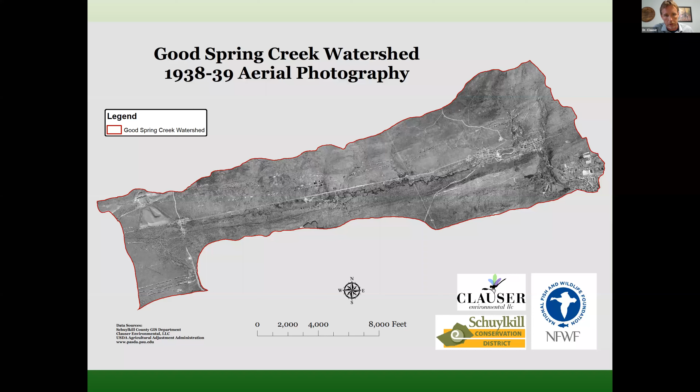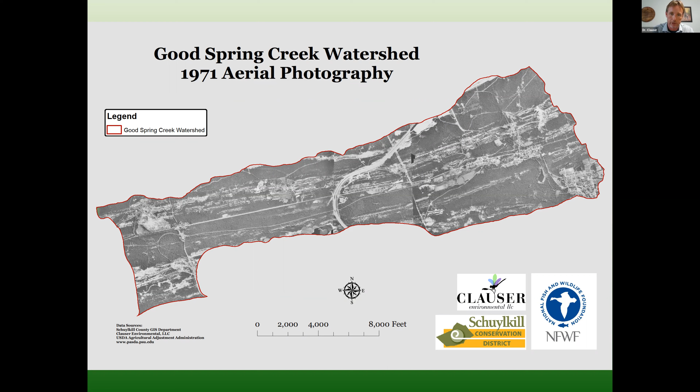And as you move from year to year, by decade or two decades in this case, you can see that the watershed overall became more forested, and there was also more development. So as things continued to get forested, mine drainage got cleaned up, but there also was Interstate 81 coming in, and we tried to figure out what's going on there with that past history of mining.

And overall, you can look at the watershed, and we assessed how many square miles there were that were forested versus impervious. So we're looking at each section of the watershed, and we really dove into that in the report, but it's sort of dry information for a presentation. So we're going to talk a little bit more about the restoration planning tonight and where we take this plan and how we get to the next steps.

So if you look at the picture in the upper left, that's showing the stream section where essentially the floodplain is disconnected. So there's been sedimentation, or maybe the channel got moved or something like that. And when that happens, the water rushes through the channel very quickly. It erodes the banks, and it basically contains all of that water and doesn't give it a place to spread out and expand. It doesn't have this interconnection with the floodplain to take up nutrients and pollutants.

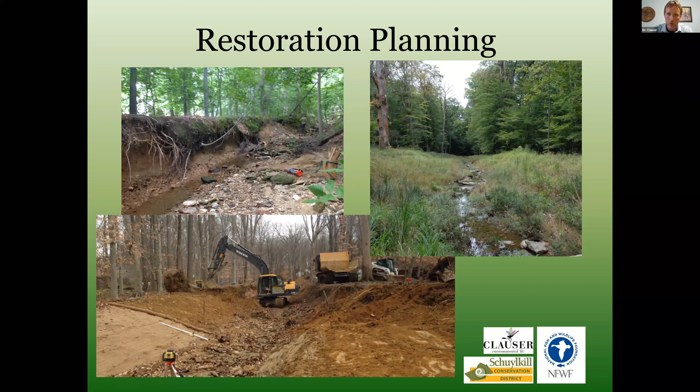And when you go in to restore the stream, you can pull back the banks and stabilize them. If you look at the left side of the channel in the bottom picture, they're basically laying it back at a stable slope, so it will not be releasing additional sediment into the stream. If you look at the right side of that bottom photo, we're actually putting in a floodplain bench there, and it's giving a place for the water to go, a place for it to expand into. And in time, it will start to grow up like the picture on the right and return to a stream that is functional and a benefit for water quality downstream and for fish and whatnot that live in that area.

So how do you get to that point of doing those projects? Well, what we needed to do was put together a plan that had GPS points, identifying particular locations with particular action items. And then we needed to prioritize those projects, put cost estimates to them, come up with potential partners so that we had people we could work with in each section, and then also convey the information for each area with a handout to provide to the landowner so we could educate people on what we were trying to do.

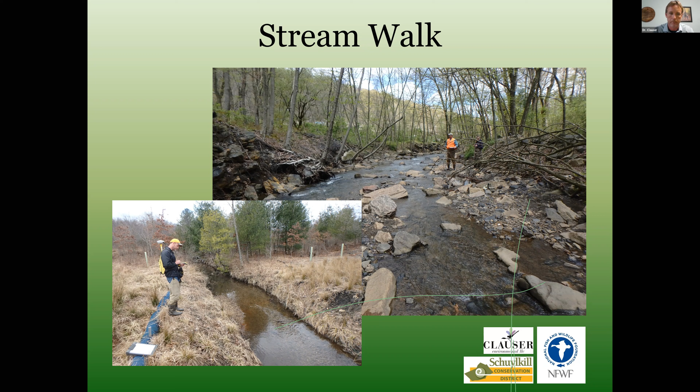So we did that by completing the desktop review, which you can read more about when you take a look at the plan, but we also did a stream walk. So the stream channel is 6.8 miles long in Good Spring Creek watershed, and Wayne and I and Alexa walked the whole stream channel, and we looked for places we could do things. Also places that were good, and we tried to figure out what can happen at each particular location. So there Wayne and I are walking through the watershed and collecting notes, photos, and GPS coordinates of things to do.

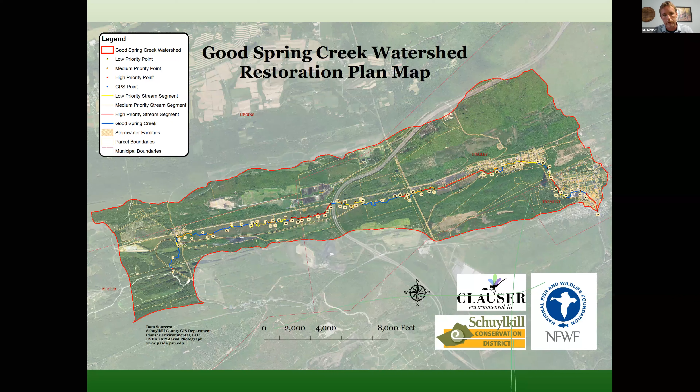And that gave us this restoration plan map. So this is the whole watershed here. If you look on the right side, along the east there, that is the town at the bottom of the watershed. That is Tremont. And then if you look at all those little yellowish colored dots, they have little numbers in them. And those are GPS points where we have something to say about what's going on in the watershed.

So if we zoom in more closely at that map, you can get a picture of what these identified projects look like. So if you look at number 14, that's a yellow point. That's a low priority point. So there's something you could do there to fix up the watershed. Maybe it's a small tree planting. Maybe it's something that particular landowner can do. Maybe there's a four-wheeler trail that is washing things into the creek.

Then if you look at some of the other sections that are orange, like 19 to 21, that's a project that's more substantial and will have, getting on the point of, measurable impacts to the creek downstream. And then if you look at section 25 through 32, those are the red projects here, and those are our high priority projects. So tonight I'm going to talk specifically about the high priority projects, and we're going to walk through those, but certainly take a look at the restoration plan.

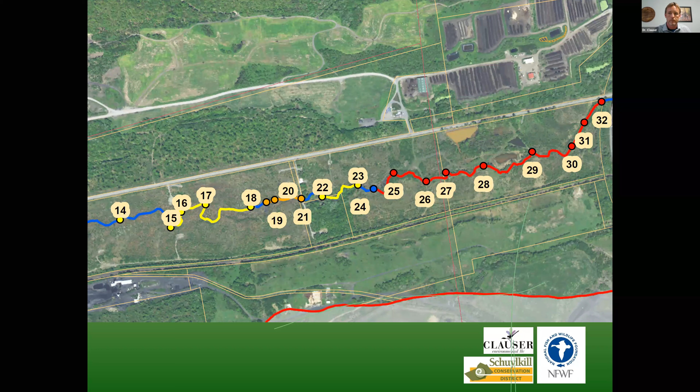If you look at the plan and you own property along the watershed, or you're familiar with the watershed, it might give you some things to do in your own backyard or nearby. So when you look at those sort of mapped areas, we came up with this prioritized list. And for each of those GPS points, there's a description, there's action items, there's partners and a priority, and then comments on it. So you can basically reference the map and come up with what can be done in those areas, or maybe it's just something to say about a particular spot and what's going on there to say, yes, this section looks pretty good.

Wayne and I were surprised when we did the study that there were miles of stream out there that looked really good. But then within the plan, we took the medium and high priority projects and we talked more specifically about those. So here's an example of one of the high priority projects. Within the watershed itself, near Good Spring, there's actually wildcat sewer discharges. So right now today, there are people that flush their toilet and the waste goes right into the stream. So this can be a problem for pathogens, for nutrients. It's just not a real good way to keep your stream in a healthy situation.

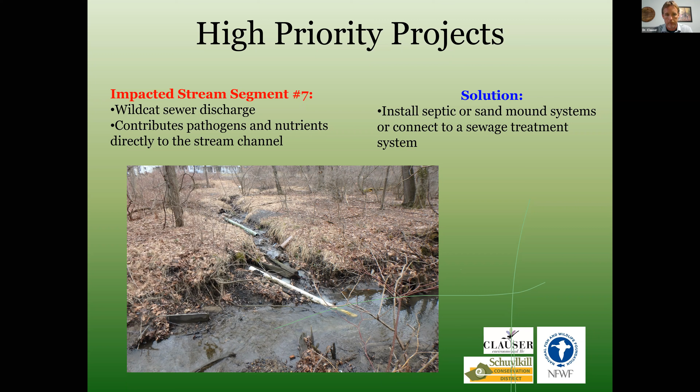And more importantly, from a biology standpoint, that fine sediment is a major problem in that it clogs up the bottom of the channel where there's rocks. So if you can picture this beautiful, pristine stream, like in the movie A River Runs Through It, where there's these boulders and cobbles. What happens with this fine sediment is it covers that up. And when it does, there's not this real diverse habitat for mayflies and stoneflies and all of these non-biting insects to live, things that would normally feed in the creek, come out, breed, and then lay eggs back in the creek. But instead it creates basically this wasteland desert bottom that's just sediment.

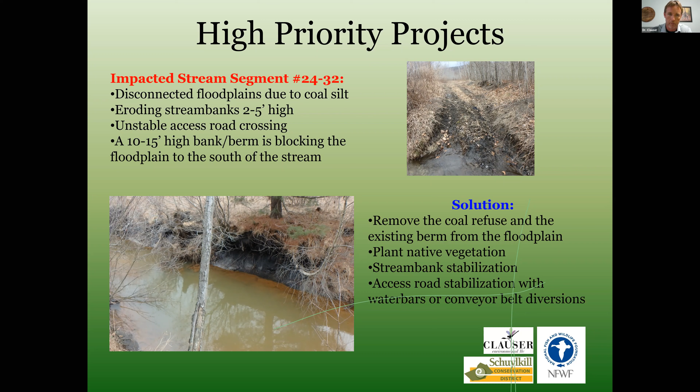Moving downstream, one of the places we came across on our walk had what's called a knickpoint. So the way streams erode, essentially they start downstream and work their way upstream. So if you think about a waterfall, the power of the stream is creating a scour at the bottom of the waterfall. And over time, that waterfall is working its way backwards upstream. So a lot of times people think that erosion begins at the top end, but in general, the erosion begins at the bottom for how these channels are digging themselves out and digging themselves down.

It can be upstream problems causing excessive water flows, but the knickpoint can really be an inflection point where you need to come in and stabilize it. So we found a knickpoint where the channel had been diverted and it's working its way upstream. So for a spot like this, we can do things like stabilize it with what's called a cross vane.

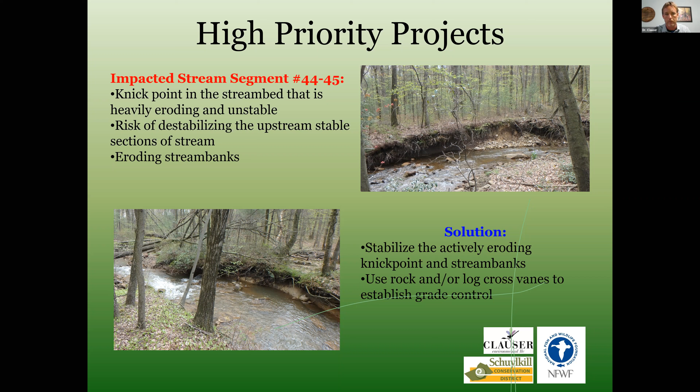So essentially we can put in a rock or a log structure that's sort of shaped like this, and you face that into the creek, and the water will roll over that structure and put the energy in the center of the stream, helping to stabilize the outside banks, but also that sort of throat of the cross vane structure in here will actually set grade. So you can step the flow of the creek down in a more gradual fashion and help prevent this largest slug of sediment from coming down the creek.

Another area, as we work our way downstream, we found really steep banks, about 15 feet high, that were actively eroding into the creek. And same thing here, basically pull back the floodplain, stabilize it, and plant native vegetation. Sort of a recurring theme in the watershed.

One of the major projects in the watershed that currently is under construction is, if you look at the upper photo in this slide, it's showing the 20 plus foot high banks that are basically waste coal that was placed in the floodplain. And every time you get a storm, the water comes up and erodes the bottom of that coal bank out, and it slides down into the creek and is carried downstream.

The material in this particular area is rather unbelievable. The stream segment is 4,900 feet long, and the floodplain has 550,000 cubic yards of material. So Wayne and the folks at the Conservation District are spearheading this restoration, and there's currently $6.6 million being spent to remove that material from the floodplain. If you look at the bottom photo, that's a section where it's really close to done.

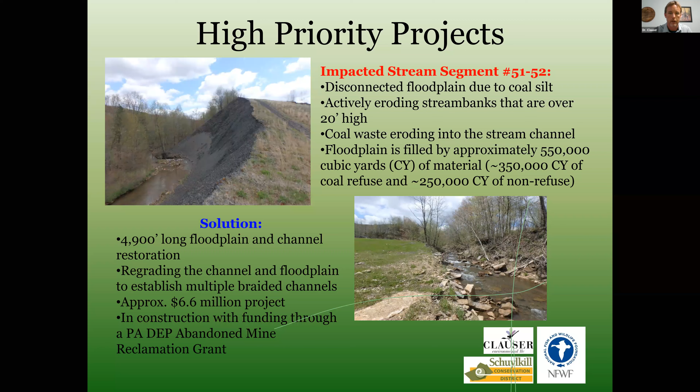So if you work your way downstream from that project that's currently under construction, there's a section there where the stream banks are 4 to 5 feet high, and those were probably just built up from coal silt that washed in from that area where the existing project is at. So it would be another place where we could come in and just remove some coal refuse, come back from the stream 30 or 40 feet with a nice floodplain bench, and then plant native vegetation.

So for each of these projects, we actually came in and looked at the LiDAR data. So there's actually 2-foot topography throughout Pennsylvania. And we could look at what would make sense to restore the creek and how far to pull them back, what that approximate shape would be. And then I estimated the approximate quantity of material we would remove and come up with a cost estimate for each project.

So when you look at the restoration plan, there'll be a photo, and then there'll be what's the problem, what's the solution, and approximately how much does it cost, so that municipalities and the county and the conservation district and watershed groups could actually come in here when some funding comes available and basically go to this shopping list of projects and say, well, geez, this project is for $200,000. Can we apply for it? And if you look, there probably is a project that'll fit into a variety of funding, whether it's multi-million-dollar or $10,000. There's really a whole variety of projects.

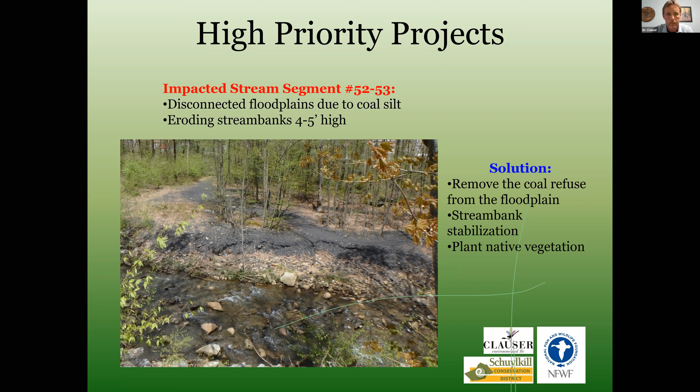As you work your way downstream, this is coming into town. There's a section there where there was actually a flood that filled in the channel itself and started to cause flooding of homes right there at the top of Tremont. And what happened in 2019 is that the municipality needed to get the channel back open to decrease flooding. But what ended up happening is the contractor pushed the material so that it blocked a secondary channel that goes sort of to the west.

So to the east of this site, there's an old folks home across the street. And to the west, there's actually this channel that flows through the woods. So this would be a rather inexpensive project to come back in there, pull that material out of the floodplain that's blocking that channel, and allow it to be a place for flood flows to go and sort of divert into the stable forested area rather than into the town.

As you work your way down through this stream section, there's also a segment at the bottom of it where the banks are just completely unstable. And you could come in here and put in what's called a rock or a log straight vane. So you would essentially bury a log or a series of rocks, almost like a jetty, but instead of sticking right out in the creek, you basically align it with the stream bank on an angle so that these rocks just roll the water back into the channel.

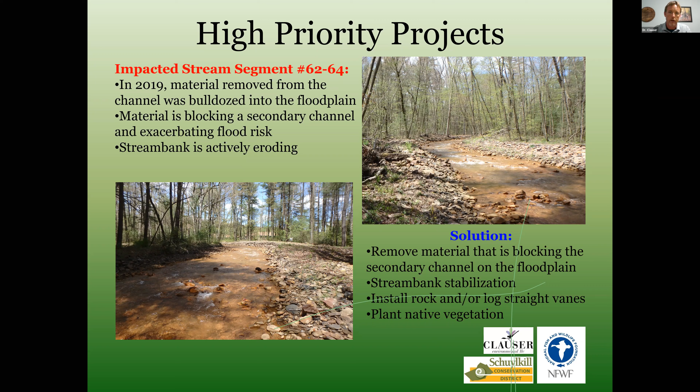As you come down into town, the problems sort of are all magnified. Basically, there's walls along the creek, but the walls aren't quite high enough when the floodwaters come. And there's bridges across the creek, but if you look at the bridge in this photo and one of the other ones in town, they have a center pier.

So there's a lot of things that can be done engineering-wise in town. One of them would be to assess whether those bridges could be replaced with a structure that lacks a center pier. The idea is that if you can remove that and redesign the bridge, yes, it will be more expensive, but in a flood condition, you will be less likely to snag trees that are flowing down the creek and things like that to block it up and sort of pump the water out into town.

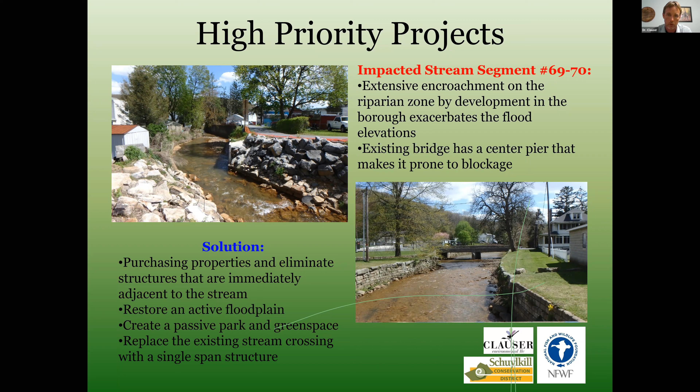In the plan, I also talk about the opportunity to potentially work with FEMA to buy out some of the houses and create a floodplain in town. So yes, you can keep building the channel up, but the problem is that it's going to constantly be an issue. So over time, the town might want to think about, yes, we might have to sacrifice a portion of the area right along the channel to create some additional flood capacity there, with the understanding that you're protecting the rest of the town. So those are really difficult decisions and really challenging things to look at when you come into a watershed like this. But it definitely is something to consider here.

In the plan, I do identify places where there are legacy mining impacts, whether they are from the actual material sitting on the surface, that culm, or if they're places where the deep mines underground are pushing out contaminated water. So the watershed itself is identified as impaired by DEP on what's called the 303(d) list. And that is a way to count if this stream is good or bad or somewhere in between. And essentially that list is saying that this stream isn't reaching its potential.

And the reason it's not, that's identified in that plan, is because of the abandoned mine drainage, both the acidity of the water and also the siltation. So our plan focuses on the siltation, but we definitely are acknowledging that there's a lot of mine-related work to do as well, which would be reclamation work.

And also an important thing is that we should continue remining areas where there are abandoned deep mines. So if there's abandoned mines there, I'm a strong advocate to come in, remine that area and essentially dig those up, because those mine shafts are allowing oxygen to get down under the surface, which helps to create the sulfuric acid that dissolves heavy metals and things like that and brings them to the surface.

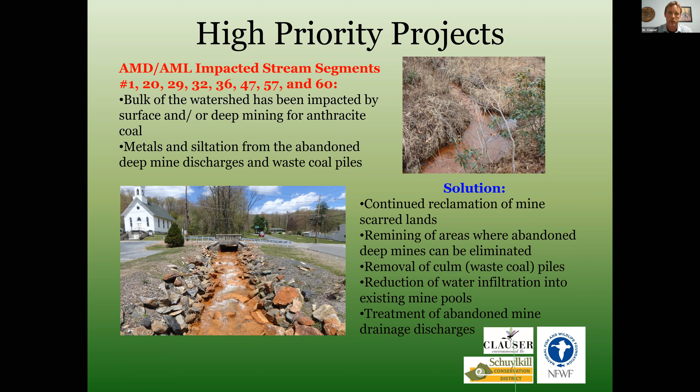So another thing that can happen is, like some of the cogen plants were burning the culm or the waste coal. Yes, it is a greenhouse gas issue, but at the same point, there's a trade-off of it restoring hundreds of acres where this material is basically sitting there leaching into the watershed. So it's a really difficult balance, but some of the coal mining and culm pile removal at the end of the day is probably more beneficial than not, which is an interesting trade-off that many people don't think about, but it's going to be difficult to fix some of the issues in the watershed without mining reclamation.

If you are out at Swatara Lake at the clubhouse and you walk to the east, you can see where a piece of old conveyor belt has been converted into an erosion control best management practice. So basically, as the water runs down the road, it hits this and is diverted into the stable vegetated area along the side.

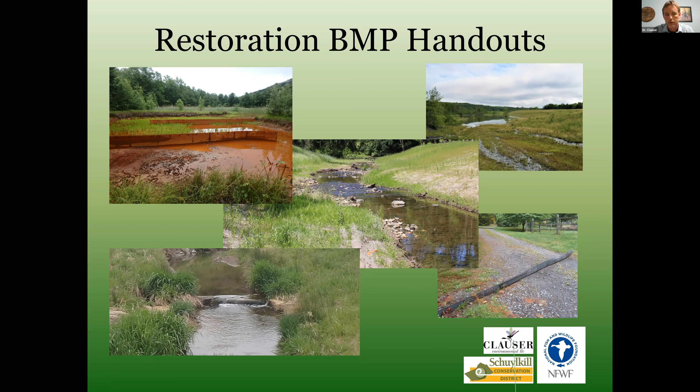And then for each of those, we essentially have a write-up like this. So I don't want to belabor the point of what the write-up is, but you can take a look at that. And the idea is the conservation district can pass those write-ups on to particular landowners that they're hoping to work with.

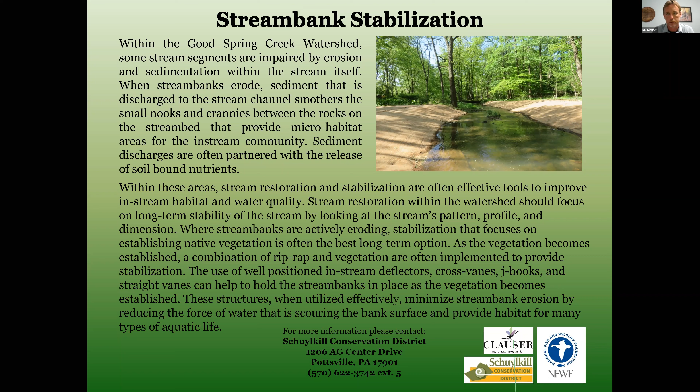And then with that, the next step in the project is going to be design and permitting. So the projects that we're identifying range from just a tree planting in an area, to some litter cleanups that are very small, very straightforward, to actually restoring the creek where we might pull back the banks or create floodplains. Those types of projects will require engineering studies and survey. And then they also will require permits from the Army Corps, the DEP, working with the Historical and Museum Commission and those types of agencies.

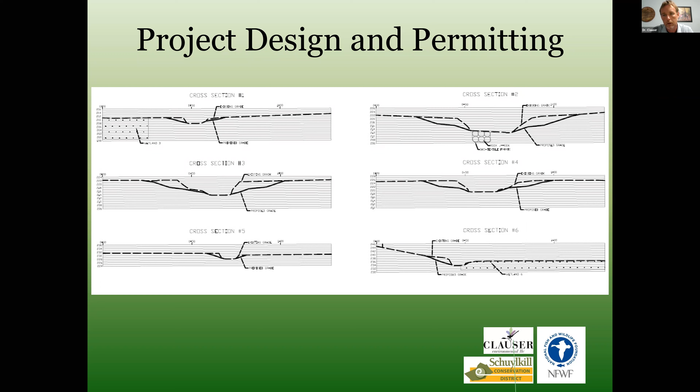And with that, we can go to construction and hopefully do some projects similar to this, where on one side of the creek there was a historic structure and we were able to come in and put some rocks and stabilize the bottom of the toe of the bank there. Got a bunch of native plantings there. But on the opposite side, we were able to pull some material out of the floodplain and create a place for the stream to go, rather than into everyone's homes and things like that.

And with that, that is what I have. So I'd appreciate any questions if anyone has them and would like to chat.

Okay, thanks, Aaron. Appreciate you taking the time to give this presentation on the important work in this restoration plan. I forgot to mention at the beginning that you have a lot of experience with these types of projects. For the folks locally in the Pine Grove, Tremont area, Aaron was one half of the consultants that designed the Swatara floodplain project there behind Guilford Mills in Pine Grove.

So I guess with that being said, if it doesn't work, they can blame you, right? Not me. So yeah, sure, whatever. It'll work. I'm not worried about it. Yeah, but had a big rain, get tested. Yeah, well, hopefully it doesn't get tested anytime soon.